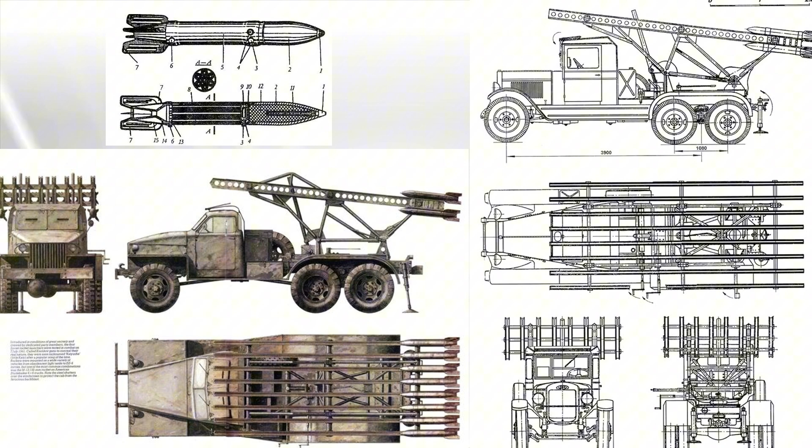The launcher, typically mounted on a ZiS-6 truck, fired salvos of 132mm M13 rockets, each about 80 centimeters long and packed with nearly 5 kilograms of high explosive. The rockets were powered by solid fuel propellant and stabilized by spin generated through angled nozzles at the base of the rocket. They could reach a range of up to 8 kilometers.

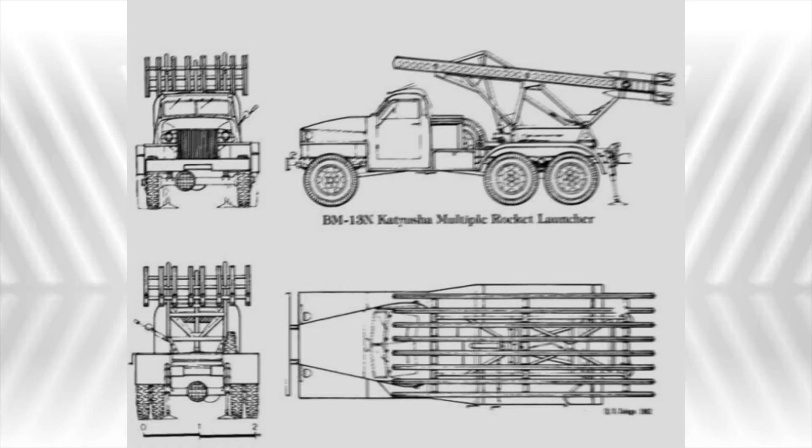Although the individual rockets were inaccurate, their impact came from volume. Up to 48 rockets fired in less than 10 seconds created a zone of destruction the size of several football fields. The launcher system was simple, inexpensive, and highly mobile. With no recoil and minimal setup, crews could fire and quickly relocate before enemy artillery zeroed in on their position.

Katyusha batteries were deployed in specialized Guards mortar units and used most effectively in pre-assault bombardments. They paved the way for Soviet breakthroughs at Kursk, Operation Bagration, and the final offensive into Eastern Europe.

The sound of a Katyusha salvo became infamous. The screeching rockets were terrifying and earned the system the nickname Stalin's organ, for the eerie pipe organ-like sound as they launched. The Katyusha wasn't precise, but it overwhelmed German troops with shock and saturation.

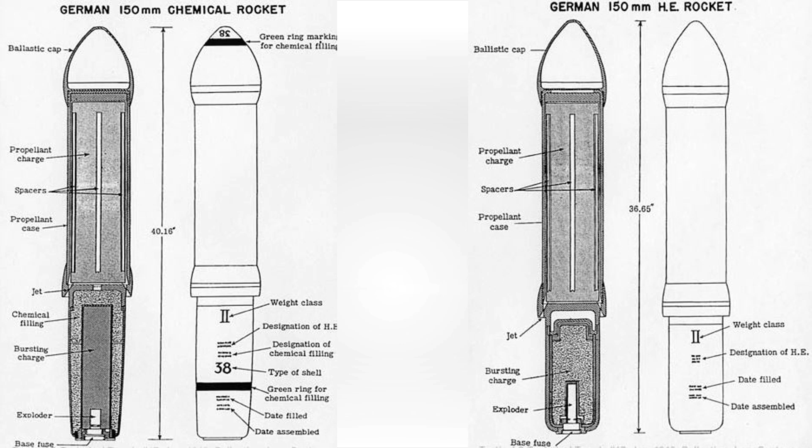The Germans countered with the Nebelwerfer, a terrifying multiple rocket launcher originally designed for chemical munitions, but later re-engineered for high explosive rockets. The 15 cm Nebelwerfer 41 featured 6 barrels mounted on a wheeled carriage. It fired 150mm spin-stabilized rockets with a range of nearly 7 kilometers. Each rocket carried around 2.4 kilograms of high explosives, and the launcher could unleash all 6 in rapid succession.

The rockets were stabilized by vented exhaust nozzles placed at an angle, causing the projectile to spin for stability in flight. But this design came with a price: it left behind a massive smoke trail, making it easy to detect and target.

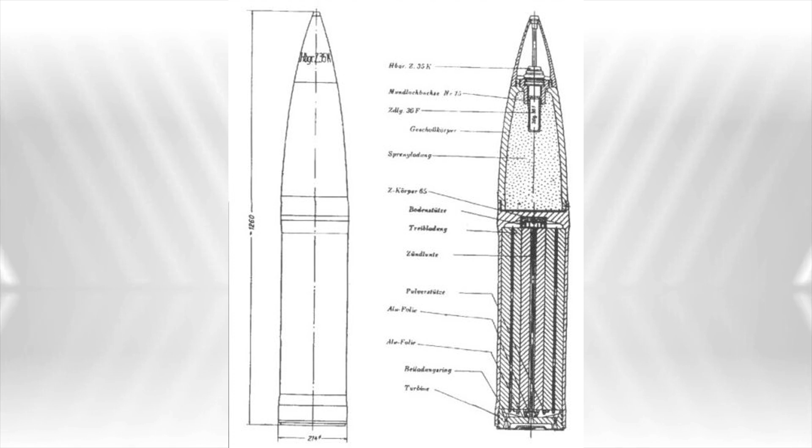The 21 cm Nebelwerfer 42 followed, offering a heavier payload and improved range. These launchers were mounted on both wheeled carriages and half-tracks for added mobility. They were often used to barrage Allied positions before German attacks, or to break up advancing Soviet formations. Nebelwerfers were typically deployed in batteries of 6 launchers, delivering coordinated strikes.

Their high-pitched, shrieking noise during launch only added to their psychological impact. Soldiers referred to them as screaming meemies. They were used heavily during key battles, such as the Siege of Sevastopol, the Battle of Kursk, and the Normandy campaign. Although effective in saturation bombardment, their lack of precision and vulnerability after firing limited their survivability.

These early rockets weren't smart, but they were devastating against troops, trenches, supply depots, and morale. Both systems were most effective in saturation bombardments, used to soften enemy positions or break defensive lines during large offensives like Operation Bagration or the Battle of Kursk.

As the Soviets and Germans mastered battlefield barrages, Nazi Germany pushed rocketry into the future, further and faster than anyone else. In 1944, the German military launched a new kind of weapon, one that didn't just fly, it buzzed and then vanished into chaos. The V-1 flying bomb was the world's first cruise missile.

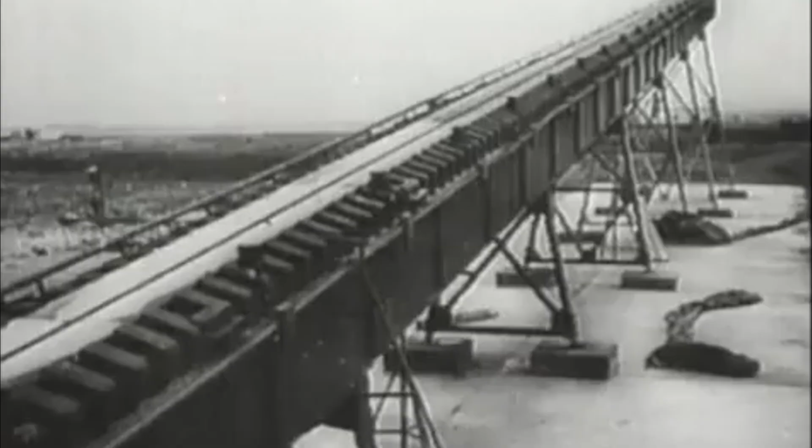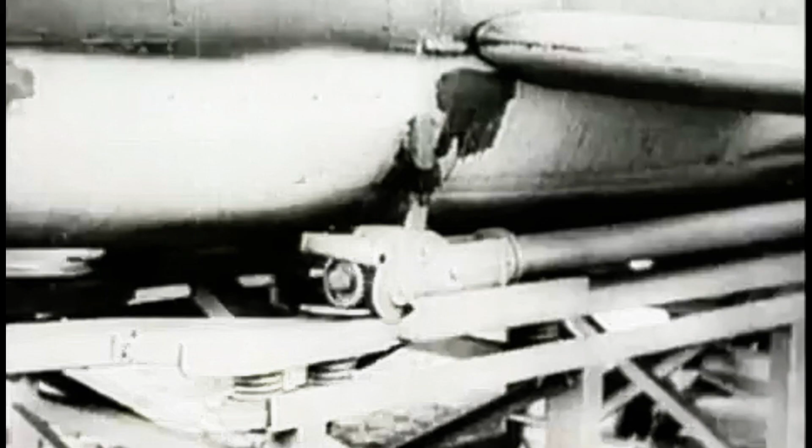It used a primitive pulse jet engine, the Argus As-014, mounted on a small winged body that resembled a pilotless aircraft. Its engine produced a constant mechanical buzzing sound that echoed over the cities below, earning it the nickname Buzz Bomb. The V-1 flew at about 640 kilometers per hour, cruising at an altitude between 2,500 and 3,000 meters.

It had a range of roughly 250 kilometers and carried an 850 kilogram warhead of Amatol high explosive. It wasn't guided in the modern sense, but it had a gyroscopic autopilot and barometric altimeter that allowed it to stay on set heading and altitude. It was launched either from inclined ramps using steam-driven catapults or released mid-air by bombers like the Heinkel HE-111.

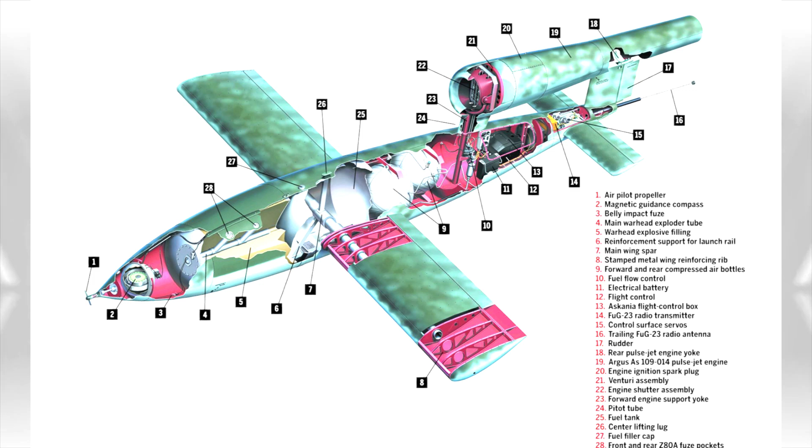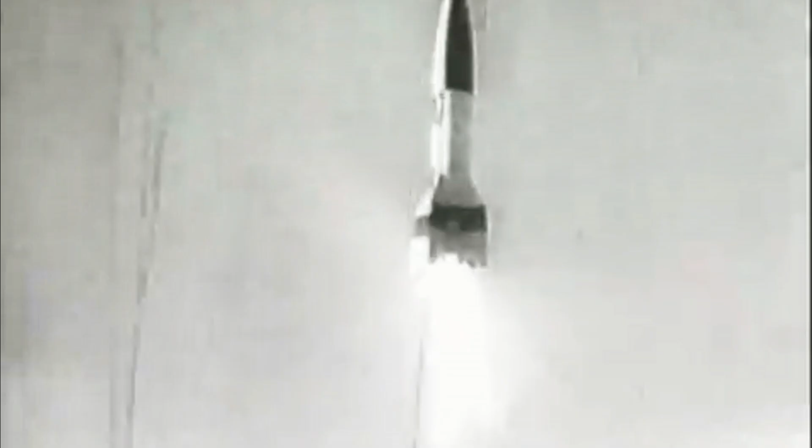But as terrifying as the V-1 was, Germany wasn't done. Next came the V-2 rocket, an entirely different beast. Developed by Wernher von Braun, the V-2 was the world's first true ballistic missile. It stood 14 meters tall, powered by a liquid-fueled engine using 75% ethanol and liquid oxygen.

It produced 25 tons of thrust, climbed to nearly 90 kilometers into the upper atmosphere, and descended over 5,700 kilometers per hour, faster than the speed of sound. There was no warning, no buzzing, just a devastating impact.

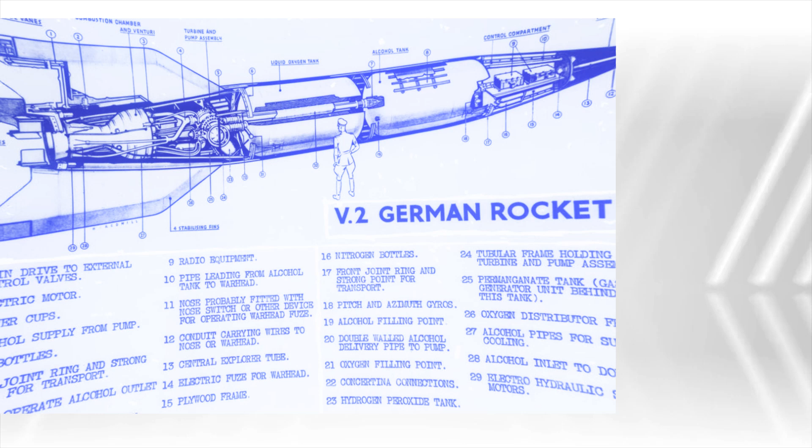It carried a 1,000-kilogram warhead, usually Amatol or Trialen, and used early gyroscopic guidance systems along with analog computers and radio signals to adjust its trajectory. Between 1944 and 1945, over 3,000 V-2s were launched, mostly at London, Antwerp, and Liège.

The destruction was enormous, but the psychological effect was even worse. You never heard it coming. Behind the technology was tragedy.

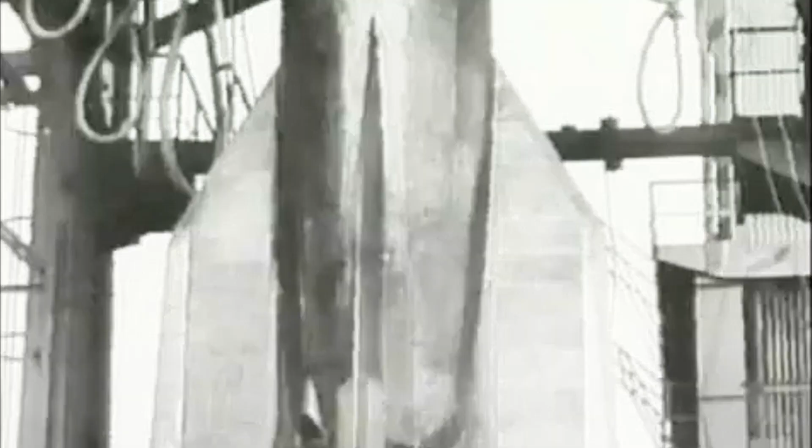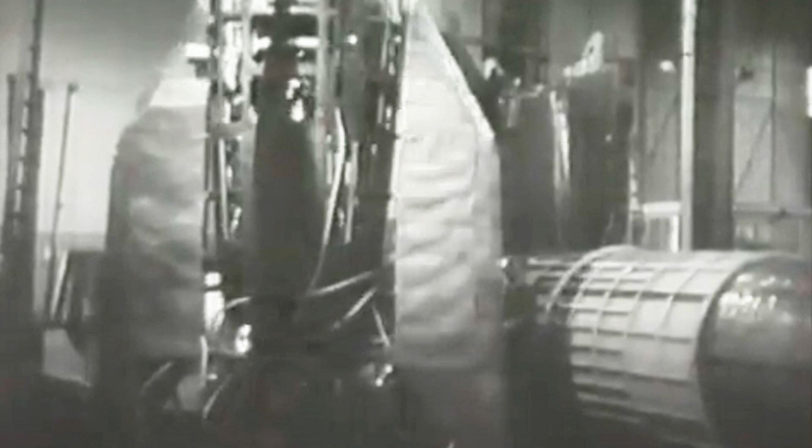The rockets were assembled at Mittelwerk, a secret underground facility that used forced labor. Thousands died building the V-2, more than were killed by it. It was the first ballistic missile in history, completely unstoppable once launched.

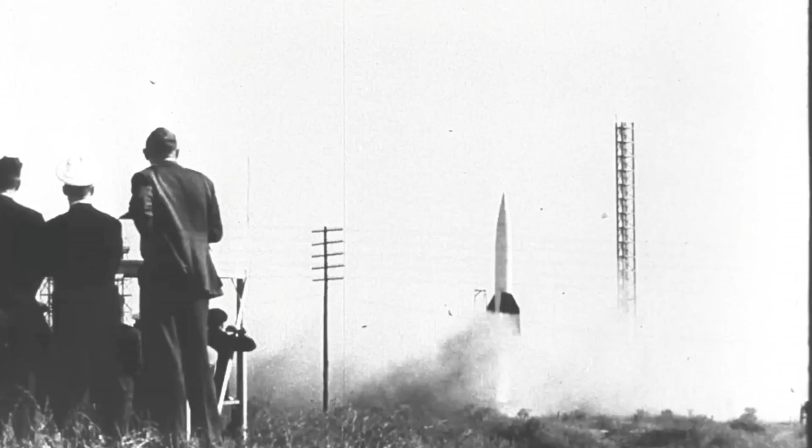Germany lost the war, but its rocket technology lived on. Operation Paperclip brought von Braun and his team to the US, where they developed the Redstone and Saturn V rockets. The Soviets captured their own teams and launched the R-1 and eventually the R-7, the world's first ICBM. The V-2 rocket didn't just end a war, it started the Cold War space race.

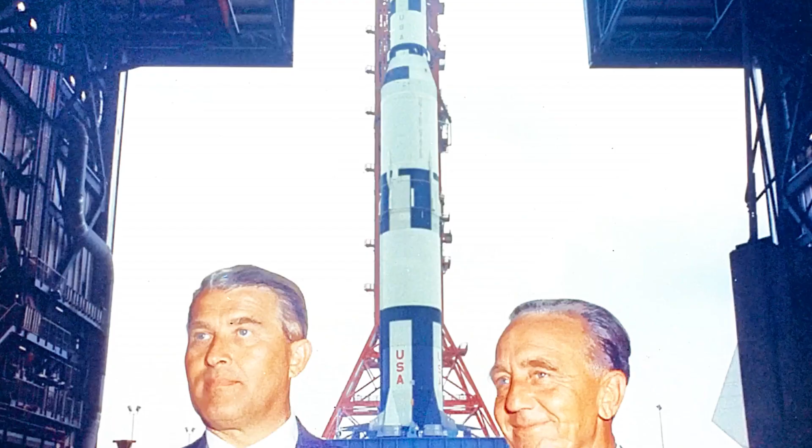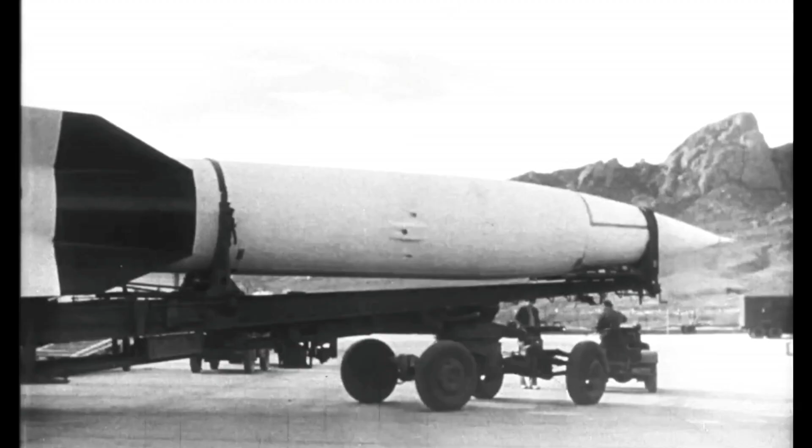World War II rocketry began with screeching salvos and ended with supersonic silence. In 6 short years, rocket technology jumped forward by decades, laying the foundation for modern warfare, space exploration, and global power. Which World War II rocket do you think had the biggest impact?